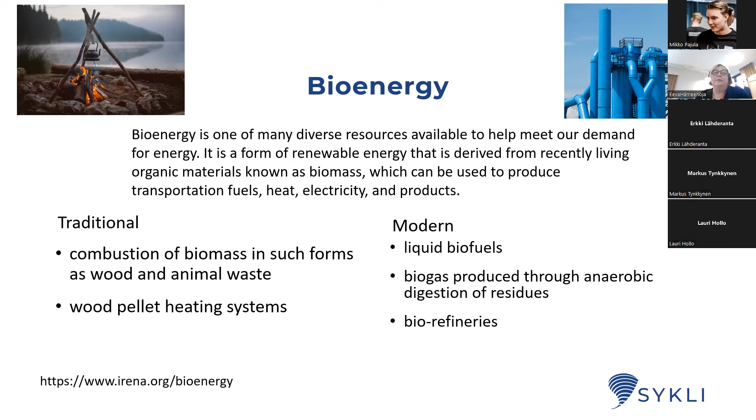The EU Renewable Energy Directive defines what biomass is, because biomass is used to produce bioenergy, and you can read the definition there. One thing which is very important is that bioenergy is part of renewable energy, but there are many other kinds of renewable energy available: hydropower, wind energy, solar energy, and so on.

But bioenergy is a very important one, and it's also important because it's very flexible and can support, for example, when we are using wind or solar energy. So bioenergy can be very helpful to maintain the energy system in that sense.

Bioenergy is also part of the bioeconomy, and besides bioenergy these products are very important. In the European Union's bioeconomy strategy, the goals are food security, employment and competitiveness, climate change, sustainable management of natural resources, and dependence on non-renewable natural resources. In Finland, we have also added ecosystem services as part of the bioeconomy.

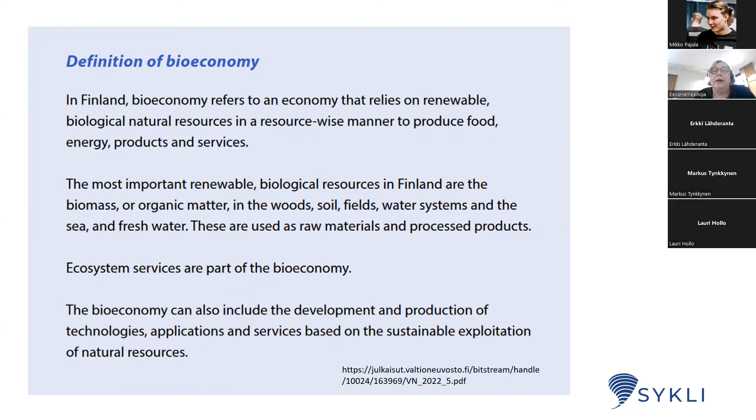This is a definition. In different countries the bioeconomy is defined in a bit different ways, but everywhere there's agriculture, forestry, and the pulp and paper industry and wood products industry are always there.

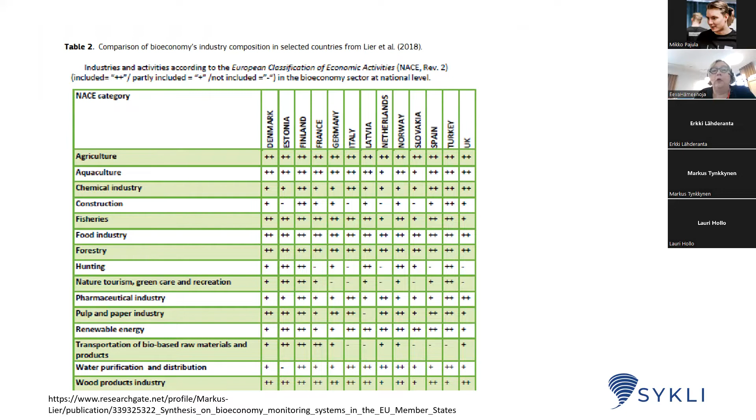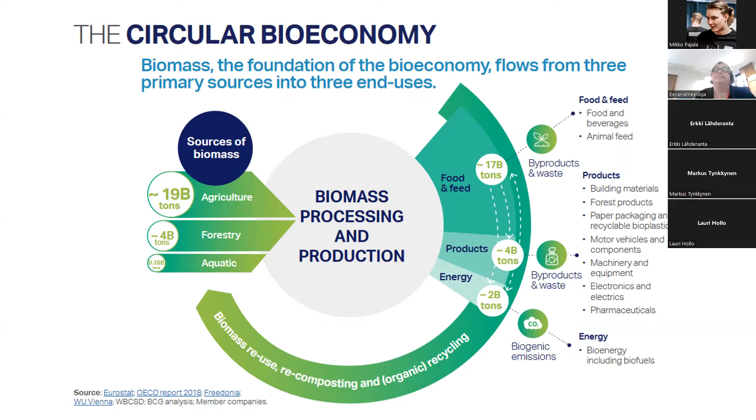Bioenergy is also a very important part of the circular economy and circular bioeconomy. When we talk about bioenergy, it's important to understand that we have food and feed, bioproducts, and energy, and in a way these fields compete with each other, and quite often we have to choose where we put our effort. So it might be that an increase in bioenergy is not possible, for example, if there's a shortage of food and feed, so this whole picture is important to understand.

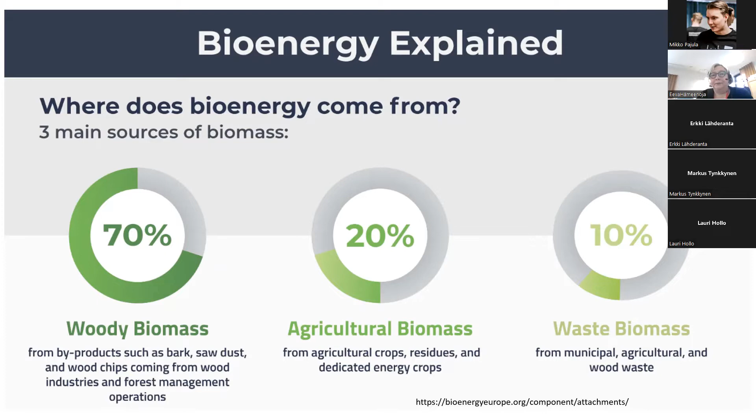So where does bioenergy come from? We have three main sources of biomass: woody biomass, agricultural biomass, and waste. As you see, woody or solid biomass is the most important, especially in the northern part of Europe.

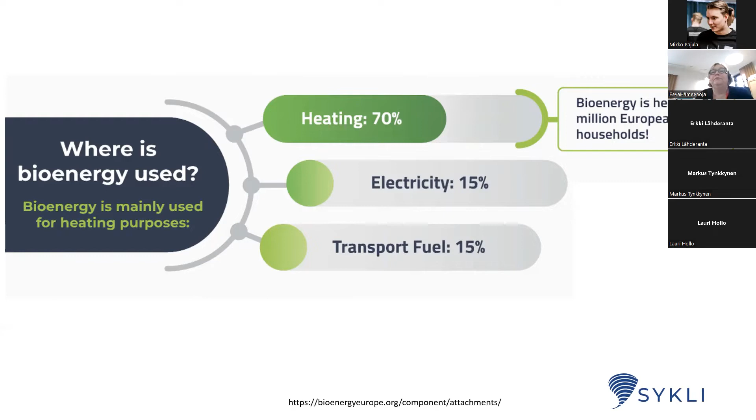And what do we use bioenergy for? The main part, about 70%, is used for heating, then for producing electricity and as a transport fuel. In heating we can use individual biomass stoves or biomass boilers, or it can be used in district heating.

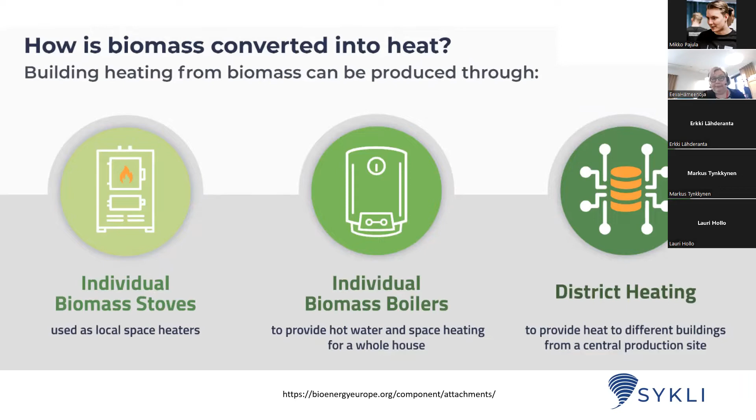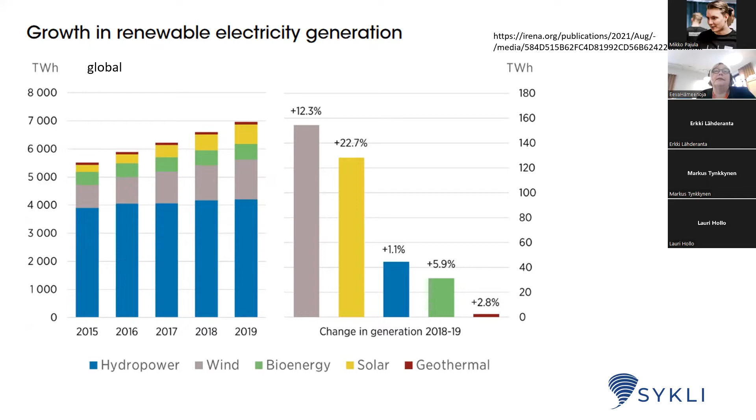And if we look at which parts of the renewable energy branch have had the most rapid growth, as you may know, wind growth has increased over 10%, and solar, the total consumption is less, but the growth is more, and hydropower has remained about the same, and bioenergy has grown about 6%.

So the EU has set a target for renewable energy, and as a whole it was 20%, but this common target was divided among different countries, and they had different national targets. You may wonder why they are so different, and this was done so that the countries reported what is possible for them and how much renewable energy they already have, so they have influenced very much the target which is set for them.

And in 2020, Sweden, Finland and Latvia had reached this target, and Portugal as well. And the others are still a little bit behind.

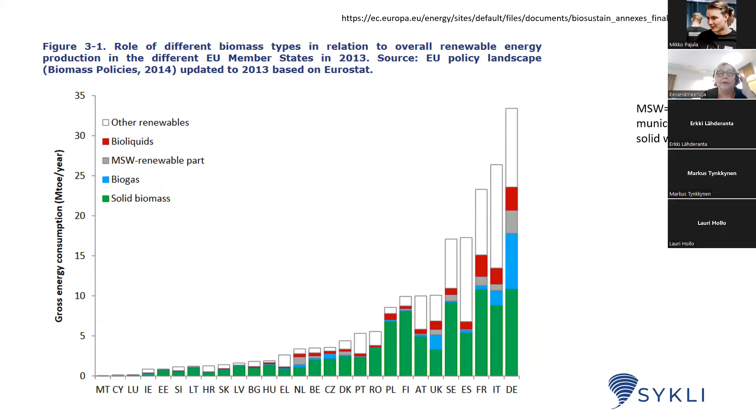This is when we look at the different countries in Europe and the biomass types used for bioenergy, and as you see, solid biomass, which means wood biomass, is the main one, and in Germany the biogas part is also quite significant. Besides this, municipal solid waste is the gray one here. Bioliquids, which are used for transport, have a smaller share, but the pressure to increase that part is quite high.

In Finland, wood fuels, of course, we are a country with a lot of forests, so wood fuel has always been very high in Finland, and if you look at total energy consumption, almost one third is covered by wood fuels. And what is very important is black liquor. It means that it's in the pulp and paper industry.

This black liquor is part of the process products, and it's used for energy production in the pulp and paper industry, but the amount of energy is so high that the industry is not using all of it, and it can also be sold to other customers. So it's a very big part of wood fuels. Then we have bark, sawdust, forest chips, sheets, and pellets.

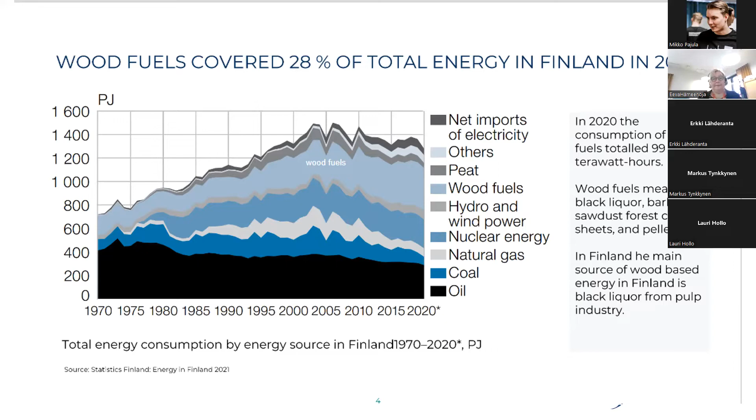So as I already said, these incentives and the use of these policy instruments have been very strong in the European Union in order to increase the production of bioenergy.

Bioenergy is also a topic where, when you read articles and news about it, they can be very diverse, because it depends on whether it is the industry, the landowner, an environmental organization, or some administrative person who is writing about it. So the opinions and thoughts can be very diverse, and it has also been an object for very strong policy instruments in Europe.

So in Europe, there's the Green Deal. There are a lot of targets for the bioeconomy: a fair and prosperous society, a resource-efficient, competitive economy, and so on. And maybe the most important is the climate law: the European Union wants to reach climate neutrality in 2050, and the energy system should be decarbonized, and so on.

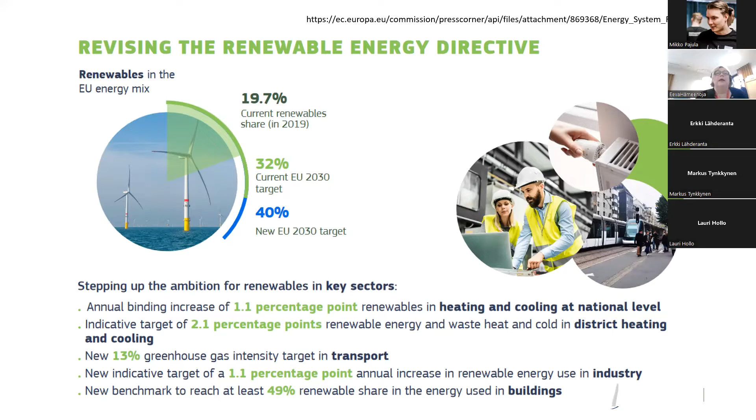It means that biomass should be used according to the highest economic and environmental added value. So in the first place, try to use biomass for wood-based products which have a long life, and try to extend their service life. Then reuse and recycle the woody biomass. Bioenergy comes only after product and material use, which should be prioritized first, and in the worst case there is disposal of the biomass.

About the Renewable Energy Directive, there are still some details here if you want to look at them more thoroughly. And I also added here the EU strategy on energy system integration, because now these energy systems are mostly linear, and there are wasteful flows of energy, and now the development is going toward more integrated energy systems. And here, as I already mentioned, bioenergy is flexible, and it can be used in many cases where electrification is difficult.

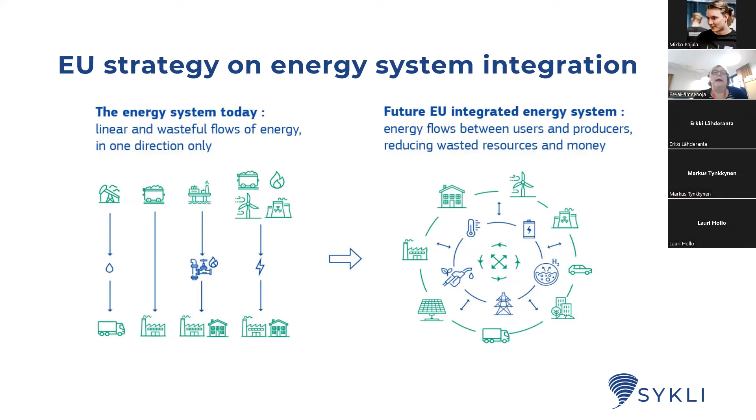For example, in wind and solar energy, the problem is that it's not always there. Sometimes it is available, but not always. So bioenergy can also then help in balancing the system.

The most criticism from industry is that these decisions change so frequently. So in order to be able to invest, the industry should have confidence that these regulations are long term, so that the investments are done in the right place and there are no rapid changes. So besides this regulation, of course, there are also some other kinds of incentives.

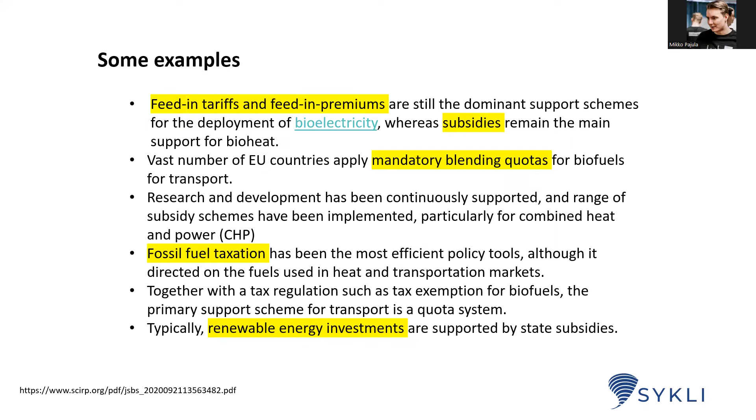And what is now maybe the most important are investments in renewable energy and bioenergy. Because we want this energy transition, and in order to do it quickly and efficiently, these investments and support for these investments are also needed from the state. Then there are some examples of fuel taxation in Nordic countries. They're a bit different, but fossil fuel taxes include both an energy content and a carbon content tax in all Nordic countries.

And because the Nordic countries have been quite successful in the use of bioenergy, when it has been studied what the reason is, the explanation, for example in Finland, is that biomass resources are good, infrastructure is good, and incentives also support their use. In Sweden, the result is the same. And in Denmark, only infrastructure has a very high contribution, and incentives somewhat. So although we criticize regulation and the complexity of the system a bit, the incentives still have an important role in the energy transition.

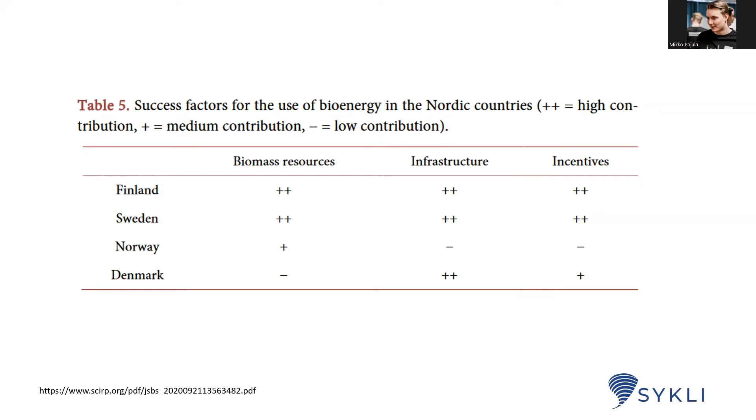Then next we should look at the feedstocks of bioenergy in the EU and Finland. So as already discussed, woody biomass is the main one, and agricultural and bio-waste also have some role. Looking at these potentials from 2020 to 2050, the forecast is that the amount of agricultural residues decreases a little. Energy crops grow a little, and forest biomass also has some growth.

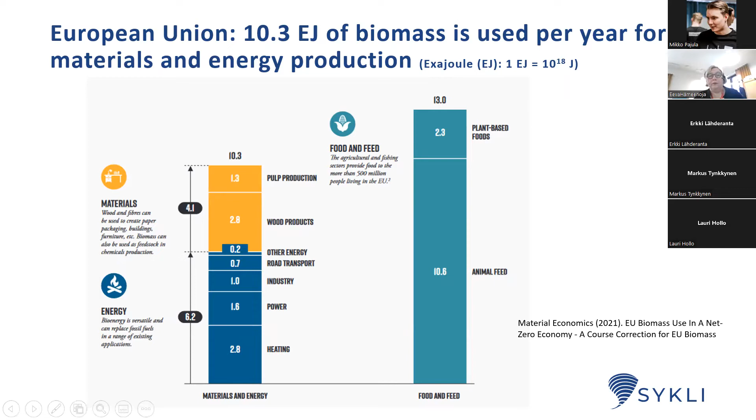In the European Union, the total amount of biomass, expressed in energy units, is 10.3 exajoules, divided so that energy has 6.2, materials 4.1, and for food and feed it's 13 here. And very often the use for energy and the use for materials are competing, and according to the cascading principle, material use should be emphasized. So it has an influence on the amount of bioenergy in the future.

Then there's domestic and industrial waste, agricultural residues, food crop residues, process residues from the food industry, biofuel and biochemical production residues, and then various organic waste flows.

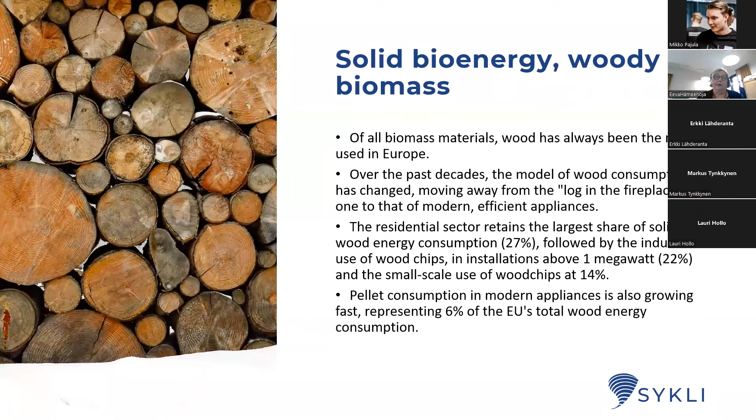So solid bioenergy, woody biomass, is most used in Europe, and we can look here more. The very traditional ones are firewood, and charcoal is most common from thermally treated woods. Then densified wood pellets and wood chips are used in energy production.

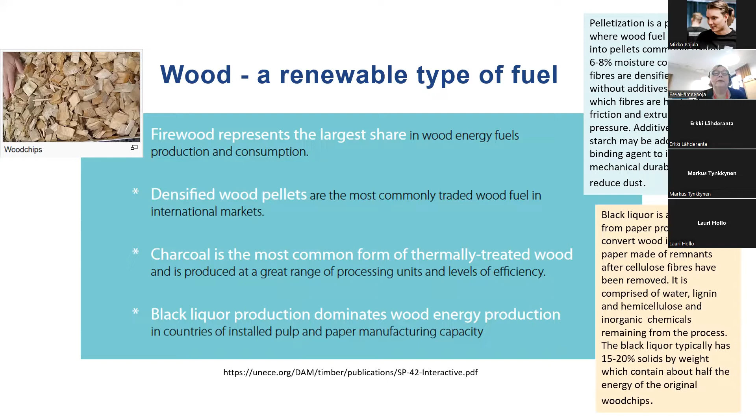And then black liquor, which I think I already mentioned, dominates the wood energy production in countries where the pulp and paper industry is significant. In Finland, wood biomass is very important. We have small-scale combustion of wood in private houses, and then we have solid wood fuels in heating and power plants, and black liquor is very important.

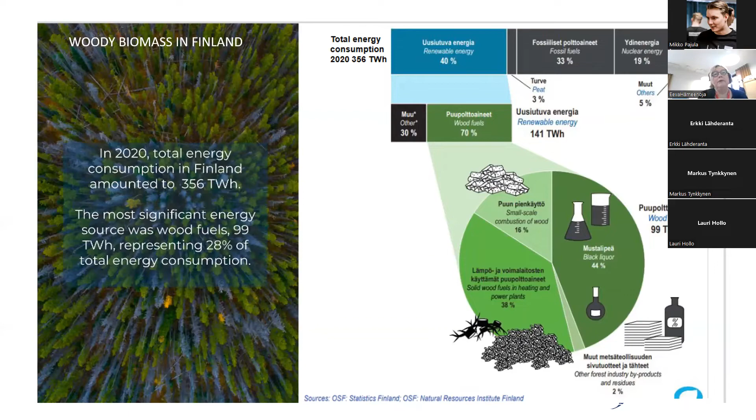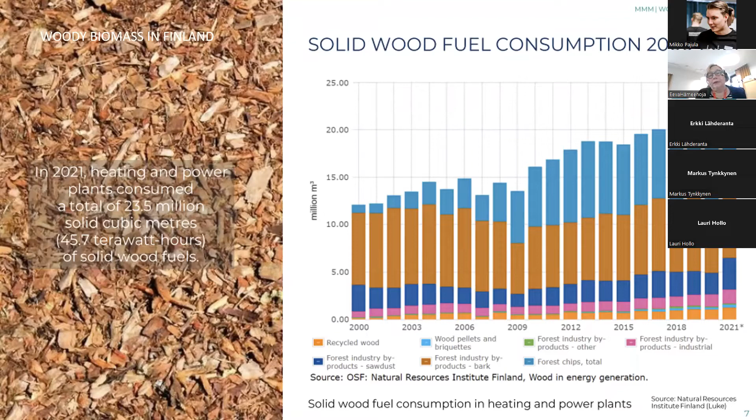Here, when we look at what has happened during the last 20 years, forest chips have increased, and also forest industry byproducts. If you look at the yield of different products from harvested tree trunks, roughly over 40% is used for building products, and about the same for pulp and paper. The share of bioenergy is much less, but it's still about 10%, a little bit more.

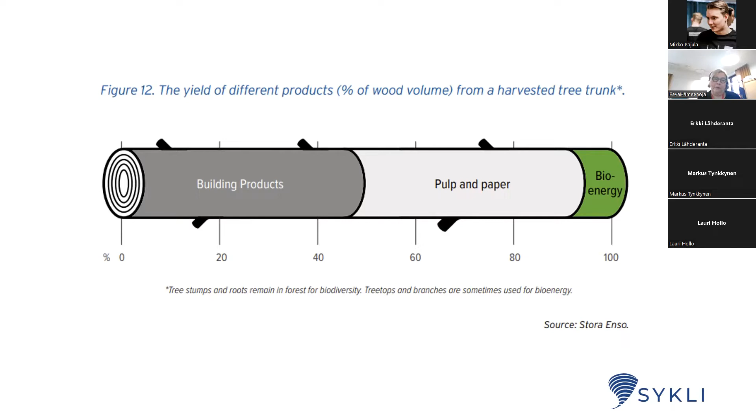And here Stora Enso mentions that tree stumps and roots remain in the forest for biodiversity. So this is a change. Previously these stumps and roots were also collected for bioenergy use, but now, because of changing requirements for biodiversity, it's more common that they remain in forests.

This is, I think, a nice presentation of biomass and energy flows. This is from the Swedish forest, and here we can see that from the stem wood, part goes to pulpwood, and part goes to timber and sawmills, and then stumps, roots, branches, and tops go to decomposition and stock increase in forests.

And if we look at the products, of course we have paper and pulp, we have wood products, and from the pulp and paper and the branches and tops, we also get district heat and bioelectricity. From pulp mills, as a side product, we can get biofuels and also other heating excluding district heat.

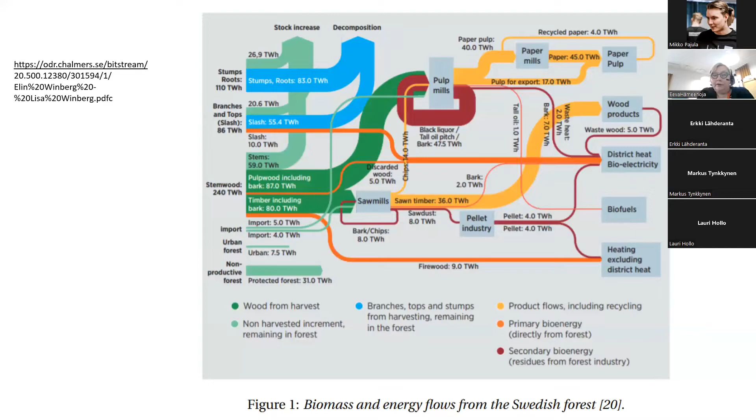And I think the trend is that the industry and also policy try to get more wood products, side products and biofuels, and decrease the share of heating, trying to utilize more of lignin and other substances of wood for more advanced products, not only for combustion.

So wood removals. We used about 5 exajoules per year, and the upper limit is estimated to be 5.6. Biodiversity and soil health limit the harvesting, so there's not much growth available. Residue removals are the same story: an increased rate can risk the carbon cycle and biodiversity. And industrial byproducts for energy use can marginally decrease over time.

About agricultural residues and dedicated energy crops. Dedicated energy crops means that there are some food crops or some perennial forest crops grown especially for energy. It can be traditional heat or modern heat, or it can be power fuels, first generation biofuels or advanced biofuels, or even chemicals and novel materials.

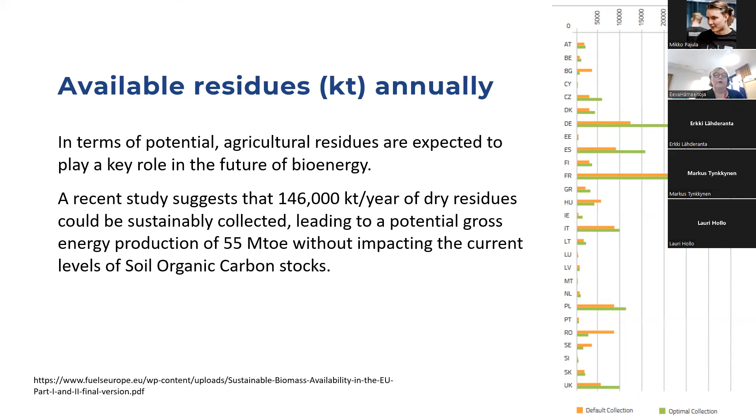But of course, there's also a limit there, so that this soil organic carbon content must be maintained. So it's all of this always when this biomass is concerned. So there has to be care that this biodiversity or these organic stocks are not overused.

When looking at the future, these food-based biofuels, it's forecast that their amount is decreasing because there are quite many agricultural constraints. The first is environmental sustainability. So climate change has influence on agriculture, especially in southern Finland, southern Europe, and also soil quality, quantity, and water.

They limit the use of agricultural biomass, and what is very important is that this competition with demand for food and feed and fibers is quite great, and so bioenergy use is decreased also because of that.

So right now in Europe, 5 to 6 million hectares is used for energy crops, and it's about 0.8 exajoules, and in this Material Economics study, they say that the upper limit would be 5.6 exajoules, but then the land needed would be 35 million hectares, the size of Germany. So that kind of growth is probably not possible in Europe.

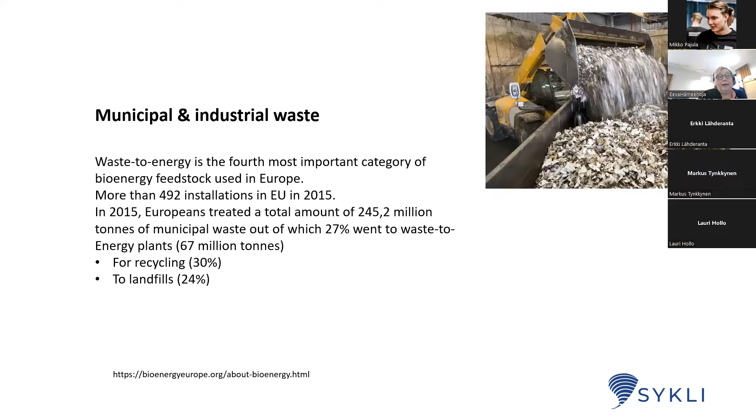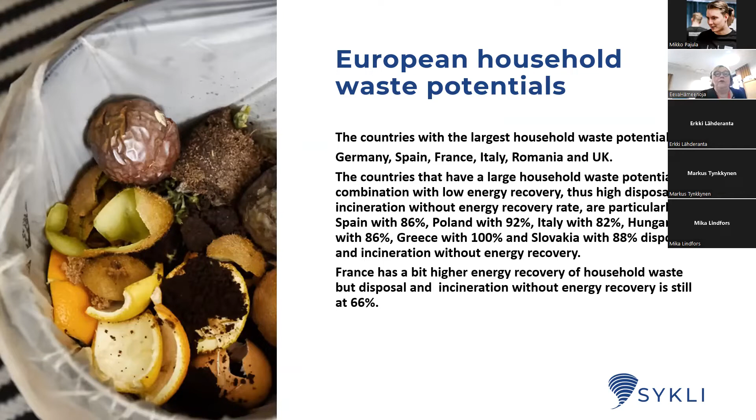The countries with the largest household waste potentials are Germany, Spain, France, Italy, Romania, and the UK. They have large waste potentials, and they have incineration without energy recovery. So they combust waste, but especially the countries mentioned here don't always recover the energy from it. So they only have the emissions, but not the useful use of that heat.

In Finland, in northern countries, and also a big part of Europe, we have a landfill ban, which means that organic waste has to either be recycled or combusted. The UK is not part of the EU anymore, but in Southern Europe we still have big countries with no ban on landfilling, and this means that this organic waste is not used, but only produces methane emissions in these landfills.

So this would need a change in the European Union, and there would also be the possibility to increase the amount of bioenergy and decrease these methane emissions.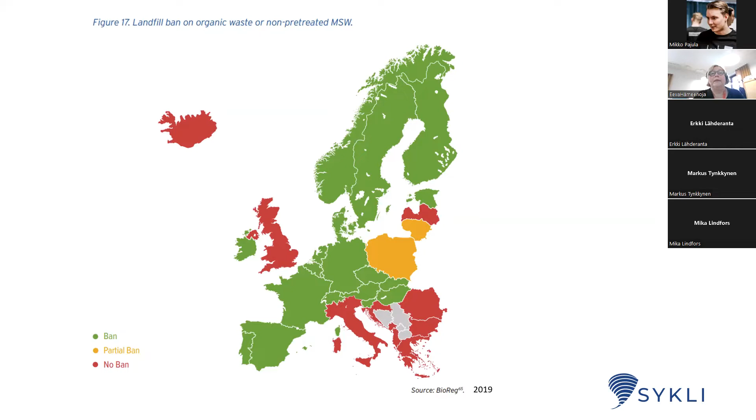If you look at the situation worldwide, there's a lot of food waste globally available. So that would be a potential for increasing bioenergy. It's only that it needs collection, it needs technology, so it doesn't come free, but it needs organization and investments.

But if you look at global bioenergy supply by source, looking at net zero emissions, the biggest growth here is in these organic waste streams. So in Europe we have a possibility to improve to some extent, but globally there's a great possibility to use these organic waste streams for energy production.

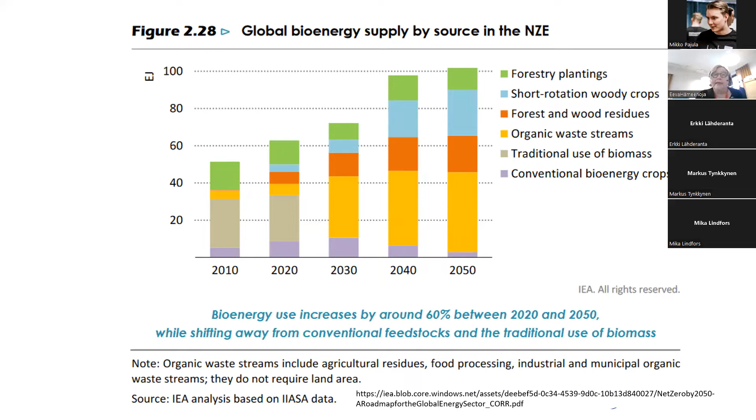So recycling and waste: for paper waste, we have a little bit of potential in Europe. For wood waste, a little. For other waste, as we saw, for example with these landfill bans, with better collection and better use of waste generated, this other waste can be doubled.

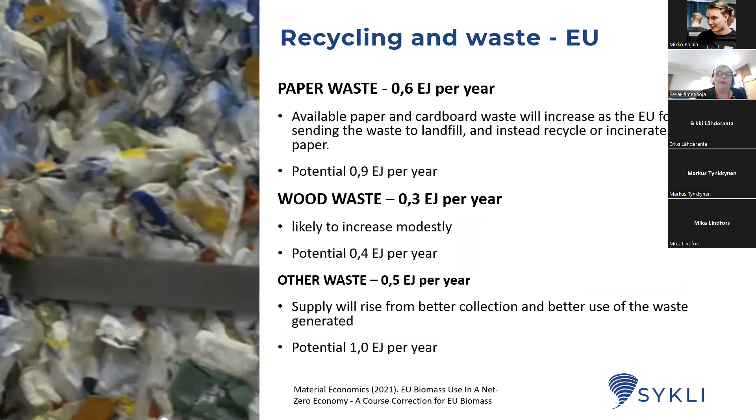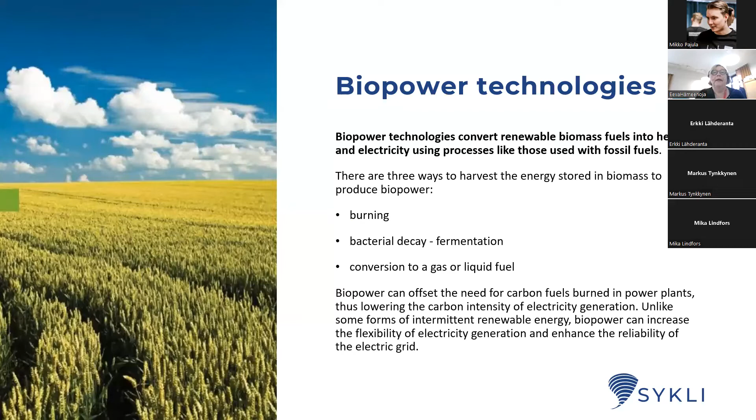And in bioenergy from waste, combustion is the most common one. There, municipal waste is incinerated in CHP plants, so both heat and electricity can be produced simultaneously, and the heat from waste incineration can be distributed to consumers with a district heating system. And district heating, of course, can also be provided through heating plants or waste heat from industries.

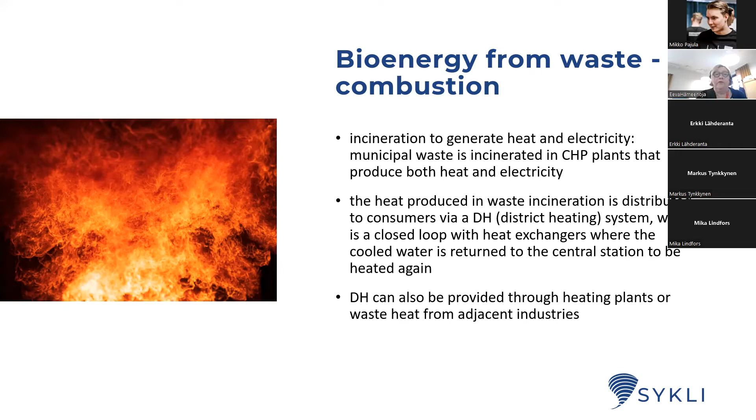So this waste to energy CHP is just a description of that. So in this CHP plant, steam is produced from the combustion, and through the steam turbine we can produce electricity, and at the same time there's a production of heat. And of course then we have some wastes here. We can have some landfilling parts, we can maybe collect some metals there, and there can be some ash, some aggregate coming from the plant.

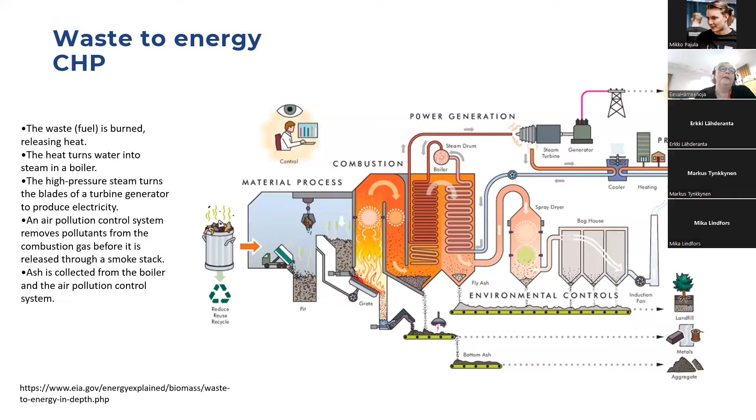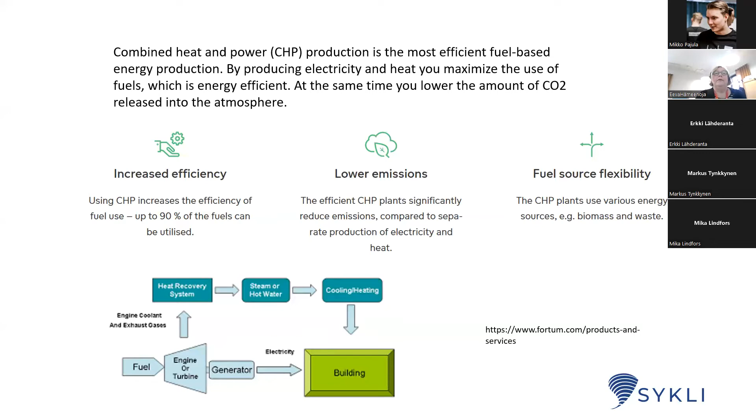And this combined heat and power is very efficient because when we produce electricity and heat at the same time, the use of fuels is maximized, and also the amount of carbon dioxide released can be reduced. So using combined heat and power, the efficiency is high, up to 90% of the fuels can be utilized, and compared to separate production of electricity and heat, there are also lower emissions, and the fuel source is very flexible. It can be biomass and waste, so different kinds of mixtures of these fuel sources.

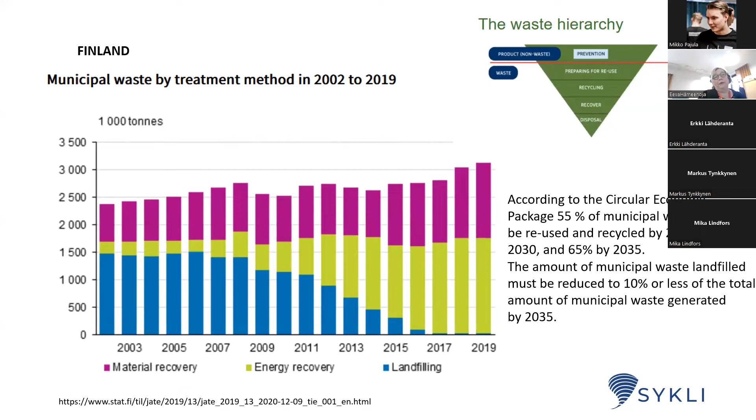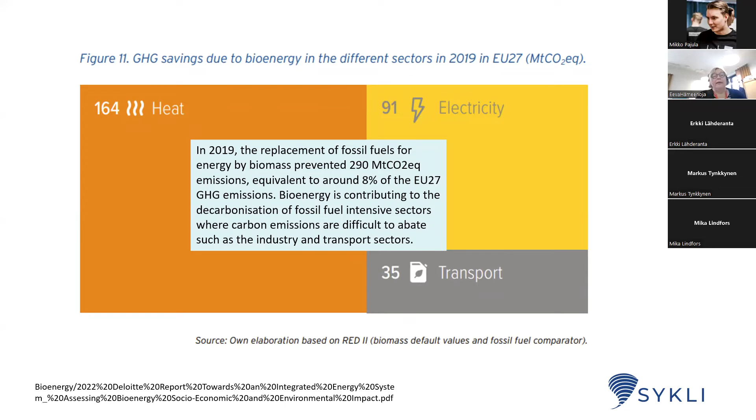On the other hand, if we look at this from the other direction, if we would use fossil fuels for heat, electricity and transport, and we replace fossil fuel by bioenergy, we can get that much savings in different sectors. And these are megatons of carbon dioxide equivalents. So using bioenergy instead of fossil fuels is very good. But if we look at it from the circular economy point of view, energy efficiency or saving energy and doing more material recycling would be the best possibility.

Because we are a little bit behind in our emission targets both globally and in the European Union, we are in the situation that we have to maybe capture some carbon dioxide from the air. We have to, of course, produce less of it or use bioenergy, but also carbon capture and storage is maybe something which is necessary in the future.

So carbon capture and storage, CCS, is important to know about also when we talk about bioenergy. When we do carbon capture and storage together with bioenergy, it's called BECCS, and it's a carbon dioxide removal technology. To meet climate goals, cumulative values of 7.5 billion tons of carbon dioxide may have to be sequestered through BECCS in Europe.

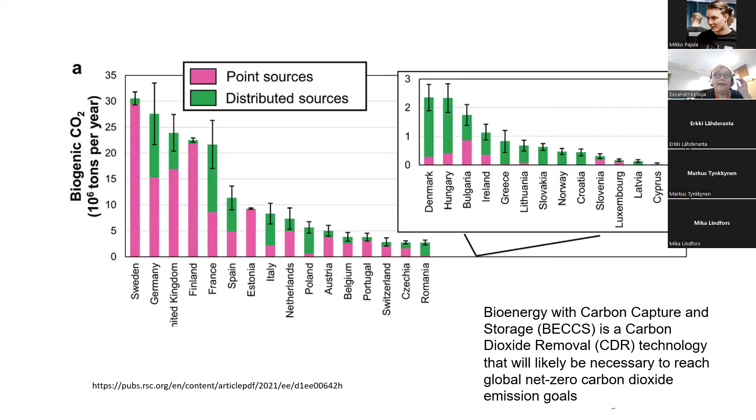If we think about this removal of carbon dioxide, of course it's easier with these point sources where there's a big power plant or something like that, and you can just centralize this collecting and you have a lot of emissions in one point, so it's easier to handle. In these distributed sources, small amounts of carbon dioxide are produced in a distributed way. So collecting or treating this emission is more demanding.

This is a bit more information about this BECCS. In Europe, Sweden, Norway, and the United Kingdom, and there are a lot of processes also in Finland developing this BECCS, with the aim of achieving negative emissions to reach the net zero climate goals. So this is just a schematic diagram of this carbon dioxide.

So if we start here and use fossil fuels, they are either combusted just to get heat, or they are used for producing some products or for transport and so on. So then there's an emission of carbon dioxide in the atmosphere, and it's net positive. So there's a positive emission coming from these fossil fuels.

If we add to these fossil fuels this carbon capture and storage, this carbon dioxide is stored in some kind of caves or underground containers and so on. So then we can get net neutrality here. As much carbon dioxide as is released is also stored.

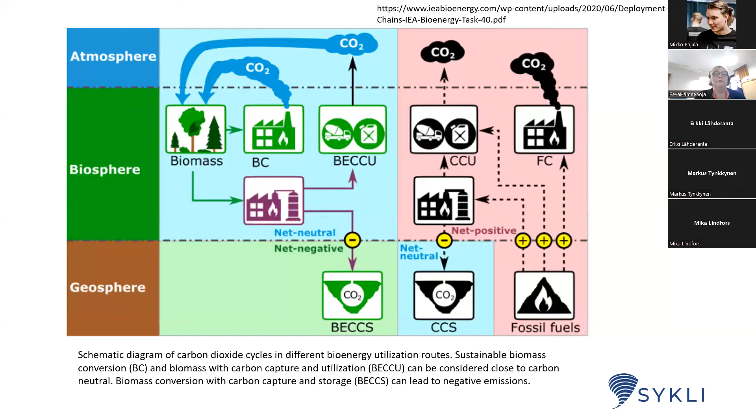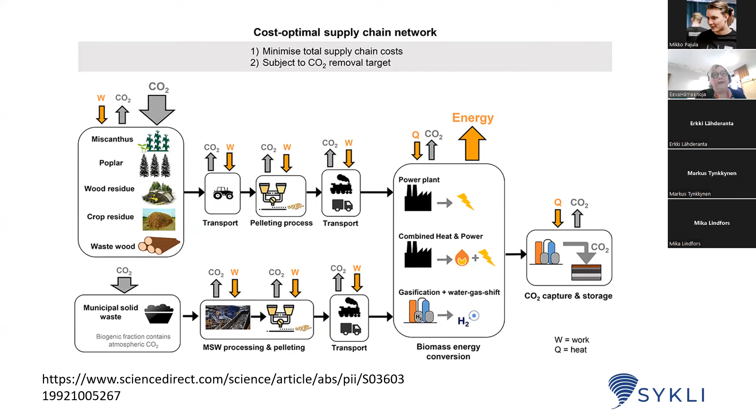Then this is only to remind that when we look at the carbon dioxide emissions of bioenergy, we can't only look at the biomass energy conversion, but we have to look at the whole chain. So it has to start here with the growing of plants, trees, transport, pelleting, transport, and so on, and all these emissions of carbon dioxide must be added. Of course, this part here is also a carbon sink, so more carbon dioxide is bound here than released. So that's a negative part of this chain.

What about then this carbon dioxide? One possibility is storage, in some kind of underground cave or container. But the better possibility would be to utilize this captured carbon dioxide, so where could it be used? One possibility is that construction materials get carbonated, so they can bind carbon dioxide to some extent.

There can be chemical conversion. If we use chemical conversion, for example using hydrogen, hopefully green hydrogen, fuels, chemicals, polymers and commodities can be produced. These fuels can be methane, methanol, formic acid, synthesis gases, and they can then be refined further to olefins or gasoline and fuels.

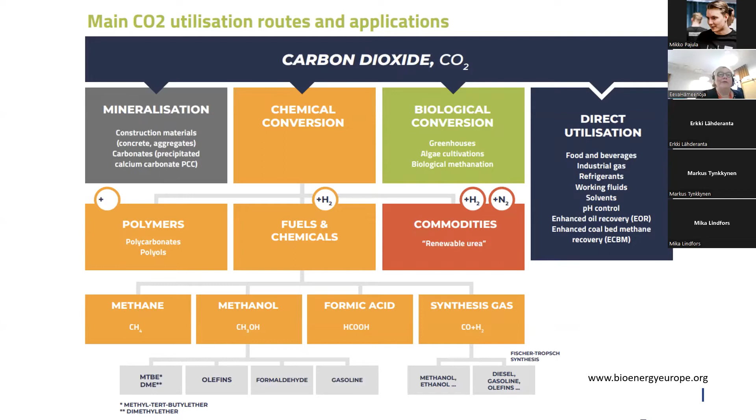But still, we are on the way. The direction is good, but we are not there yet. One branch of this bioenergy, biogas, is something which is already here and it's already used. And the European biogas sector is very diverse. It can mean waste management or generating renewable energy, or a combination of these two.

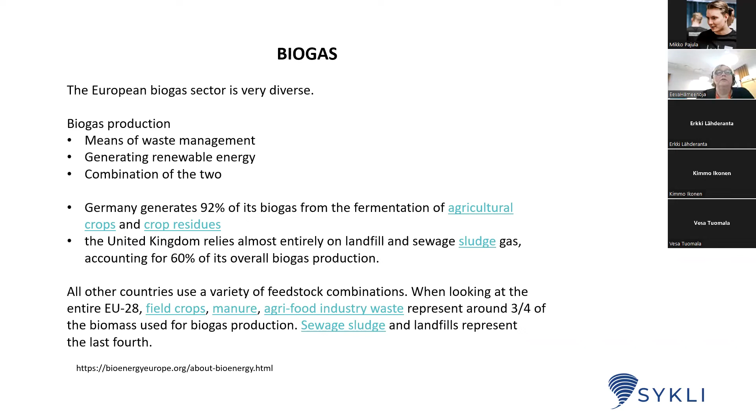For example, Germany generates almost all of its biogas from agricultural crops and crop residues, and the United Kingdom from landfill and sewage sludge gases. Other countries use a combination of different feedstocks. And this biogas is applicable in numerous sectors, in heating and cooling and electricity production and so on. And what is good is that this production process is mature and resilient. It can make use of a great variety of substrates.

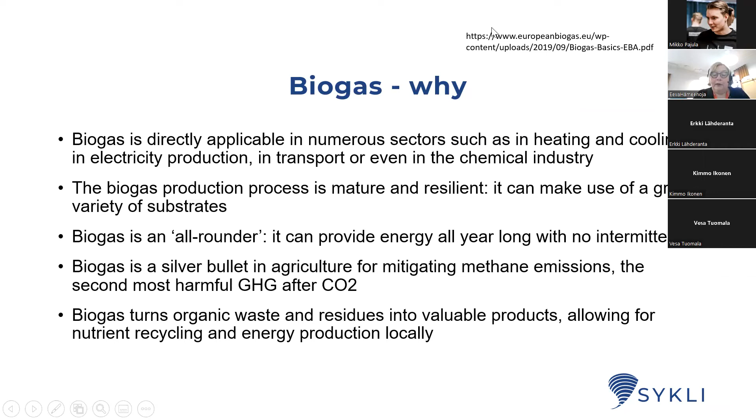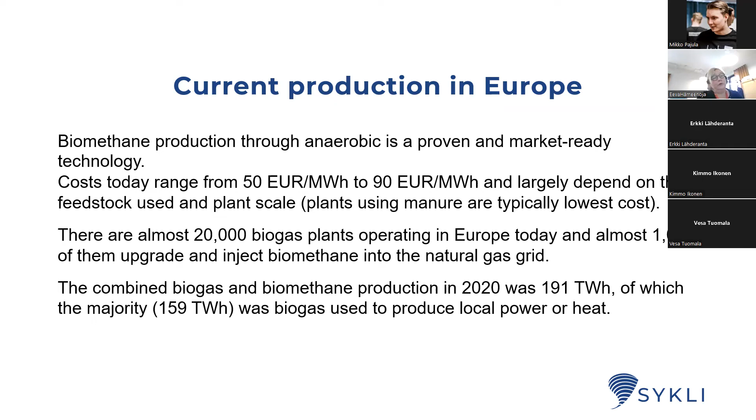So while these CCS and BECCS I was talking about are still under development, and also this chemical conversion, biogas is already here and it can be used. It's a market-ready technology, with almost 20,000 biogas plants operating in Europe. It starts here: the feedstock can be sludge, animal byproducts, household bio waste, and so on.

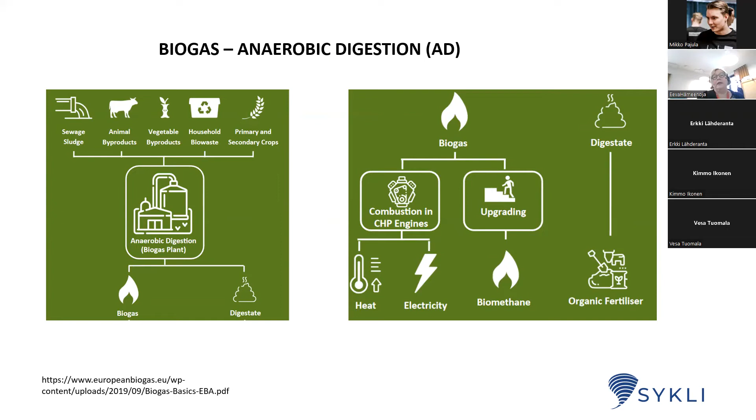And then we have the anaerobic digester and biogas plant, which produces biogas and digestate. When we take these products, for the biogas there are two ways. It can be either directly combusted in CHP engines for heat and electricity, or it can be upgraded, meaning it can be dried and purified to biomethane, and then it can be used as a traffic fuel. And the digestate can be used as organic fertilizer, which can then replace fossil fertilizer use.

So this is about the same. It's this anaerobic. Yes, and besides this upgrading to methane, biomass gasification and methanation can also be used, and it can be put in the gas network or used as fuel. The difference between biogas and biomethane is that biomethane is quite pure methane, and in biogas there are also some impurities, some carbon dioxide and so on. But for combustion, you can also use unpurified biogas.

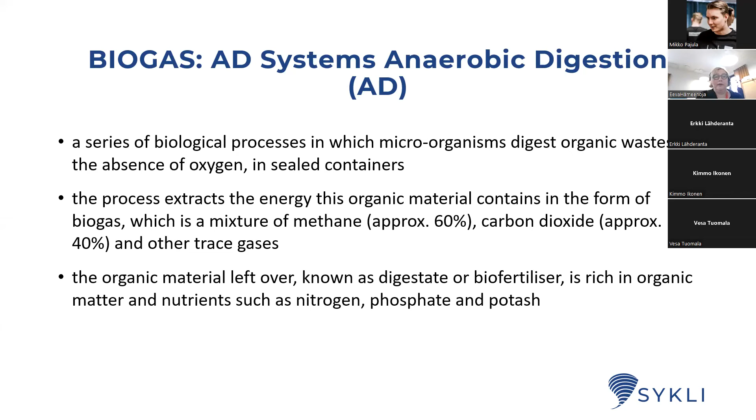So anaerobic digestion is, as in the name, in the absence of oxygen, and there are some microorganisms which digest organic wastes, and there's a mixture of methane, carbon dioxide, and other trace gases. These are the end products, and this is the biomethane, which is one of the most flexible renewable energy carriers, and it can be produced throughout the whole year, and it's very flexible.

And right now the situation, for example, in Finland is that fossil methane has always been cheaper than biomethane, but now, because of the war in Ukraine and the situation that we can't import gas from Russia, biomethane is one of the cheapest fuels one can use in a car.

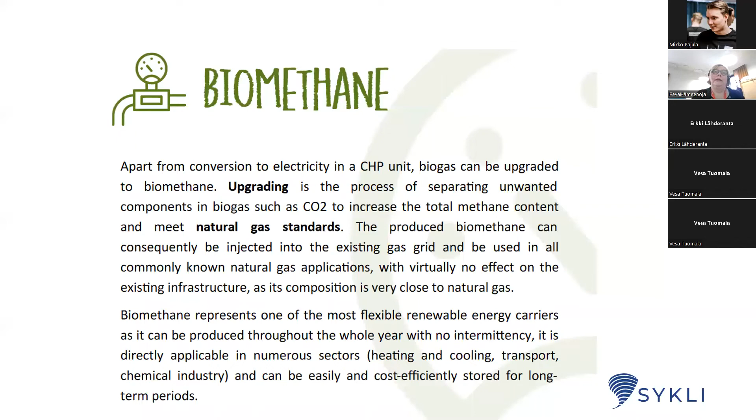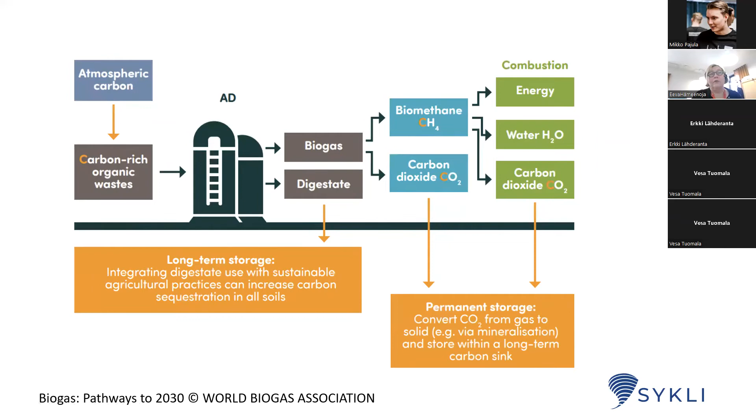Biogas can also be considered a very important part of the circular economy. So it can return nutrients to farms. It can avoid emissions from landfill, generate renewable energy, and a lot of carbon savings can be achieved because of it. And permanent storage of carbon dioxide can also be done, of course, with biogas production, so that we would have negative carbon dioxide emissions if we add that to this production.

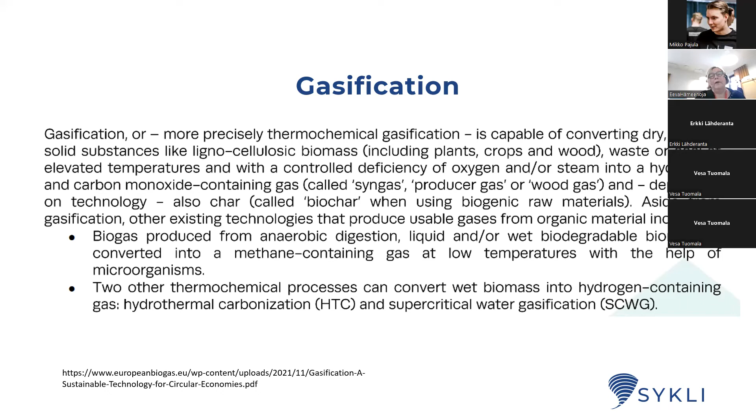Another technology which I wanted to add here is gasification. Anaerobic digestion is the one which is very much used, and it's well known. With the gasification process, we can convert dry organic solid substances like lignocellulose biomass, waste, coal, to so-called syngas, producer gas, or wood gas, and that again can be converted to methane-containing gas and also to other substances.

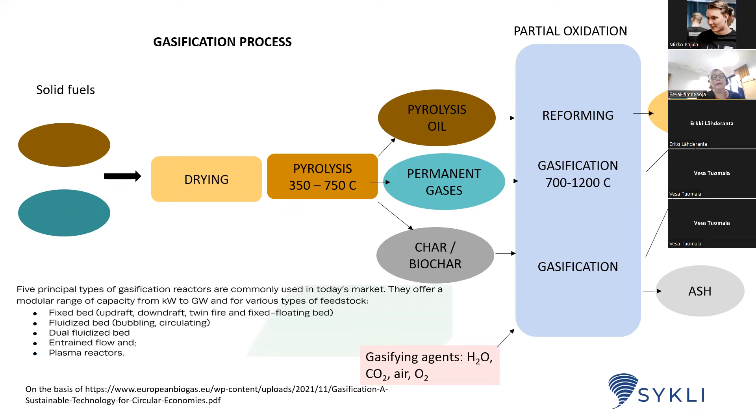And why this gasification and syngas is so important is that syngas is a mixture of hydrogen, carbon monoxide, and some light hydrocarbons, and the syngas can be converted to fuels, mixed alcohols, methane, hydrogen, ammonia. So gasification has the potential to turn waste disposal into revenue streams for forest wood owners and producers, and it's a well-known and used technology.

Also these gasification plants produce not only renewable energy but also this carbon-rich material, biochar, which can serve as a stable carbon sink. There are new products where this biochar is mixed in the soil or in composting processes and so on, and it increases the organic carbon content of the soil, and also improves its qualities.

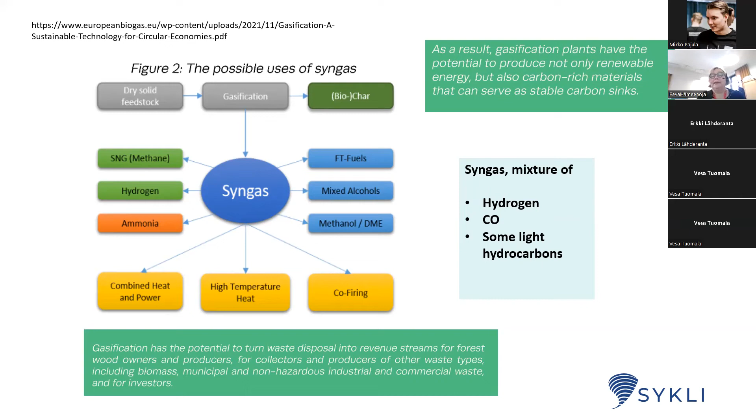With biogas, the global food waste alone could produce enough natural gas to satisfy the demand of Germany, or electricity for over 100 million people, and then there's livestock waste, which could produce enough natural gas to meet the demand of both India and China, and so on. So we already have the technology, and there is a lot of waste which is not utilized.

So organizing and investing in this branch, I don't know if it's easy, but anyhow it's a possible alternative to produce more bioenergy and to reduce emissions, and also to improve the economy, for example, in the developing countries.

In Finland we nowadays produce 1 terawatt hour of biogas per year, and the capacity of Finland would be 25. Now the goal is to increase the production to 4 terawatt hours by 2030, and this would be very important for the Finnish countryside, because there are a lot of economic problems because of the high prices of energy and fertilizers, and in some parts there's also a problem of how to treat the manure of the cattle and where to put it. So increasing the amount of biogas would solve many problems at the same time.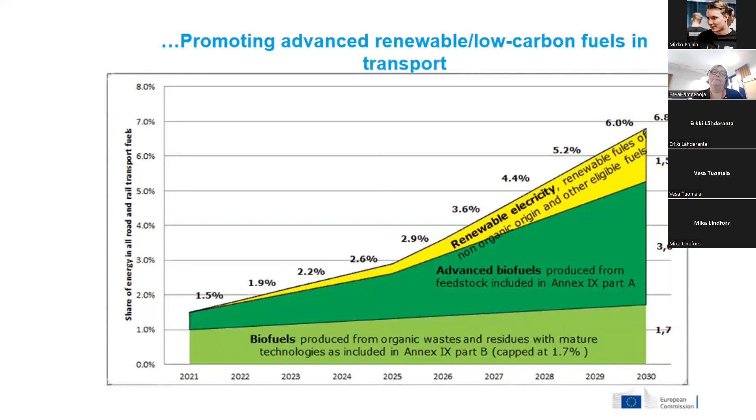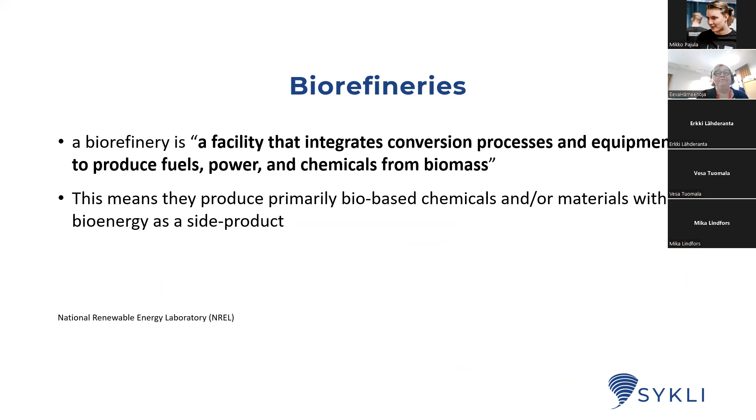Before we go to the challenges, I'll talk some words about biorefineries. The definition is a facility that integrates conversion processes and equipment to produce fuels, power, and chemicals from biomass. It's a very fast-growing sector in Europe. In feedstock, there is either primary biomass or secondary biomass. The primary is aquatic, lignocellulosic from croplands and grasslands, lignocellulosic from forestry, and so on, and these are the residues and wastes here.

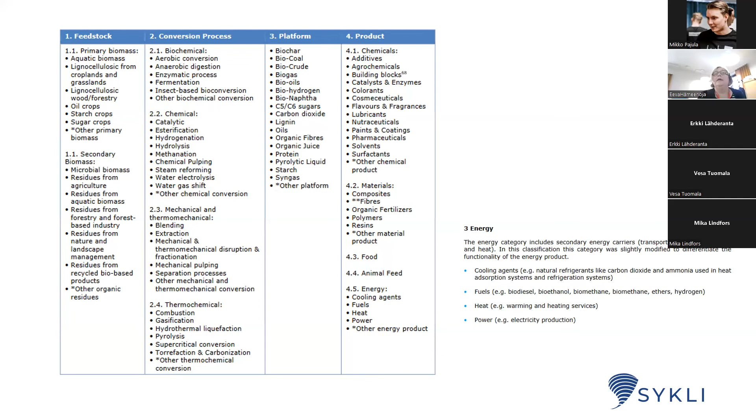Then the conversion processes: biochemical, so fermentation or anaerobic digestion, what we already discussed. Then there are more exotic ones like insect-based bioconversion and other biochemical conversion. Then chemical catalytic conversion, mechanical, and thermochemical, with thermochemical combustion at the bottom. This platform here is the product group used, and then here are the products. As you notice, most products are either chemicals, materials, food, or animal feed. These don't directly belong to bioenergy, but we also have the bioenergy part: cooling agents, fuels, heat, power, and other energy products. Very often this energy part consists of side streams, side products when producing these chemicals or materials.

And in Europe, well, in 2020, there were about 140 biorefineries based on chemical pulping. And what did they produce? They produced man-made fibers, pine oil products, and biodiesel and naphtha. And what they were developing is biodiesel and naphtha, which was also there on the plant side, biochemicals and lignin oil.

And this is category 1, the most common biorefinery based on lignin or wood materials. So forest-origin feedstocks and facilities based on chemical pulping, and the main product is cellulose fibers, and then there are side streams: materials, chemicals, fuels, food, feed, pharmaceuticals, cosmetics. They can be either produced on site, or these side streams can be sent to conversion units off site, and here the product set is the same as in the on-site part.

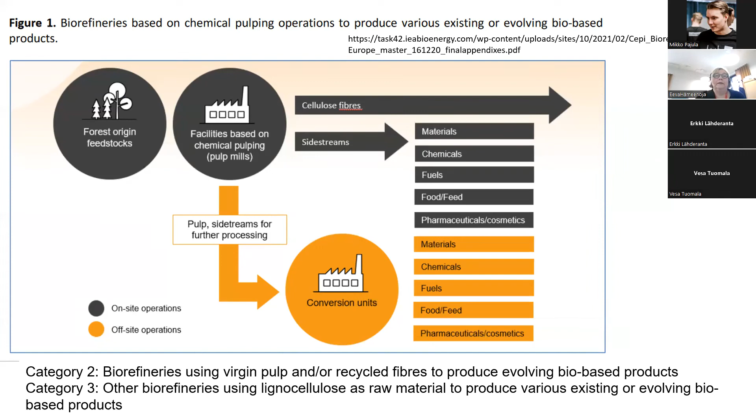And the other categories are biorefineries using virgin pulp and recycled fibers, and biorefineries using lignocellulose as a raw material. Well, here the text is a bit small, but hopefully you can read it.

So it means that those substances which in earlier years went to the black liquor and were burned and used for energy production can now also be used for material and chemical production, and their value in that form is much higher, although bioenergy is also important for us.

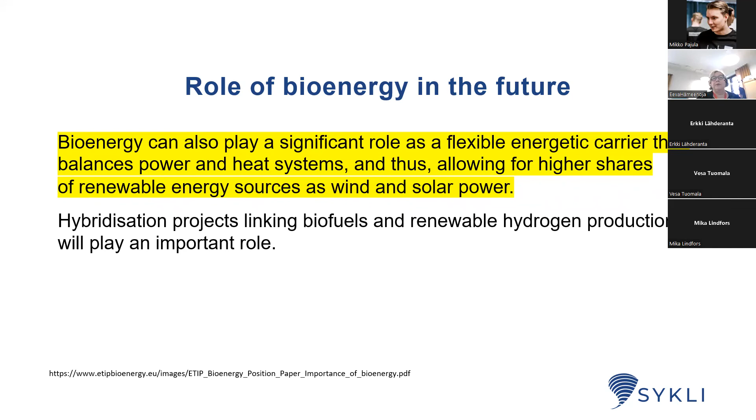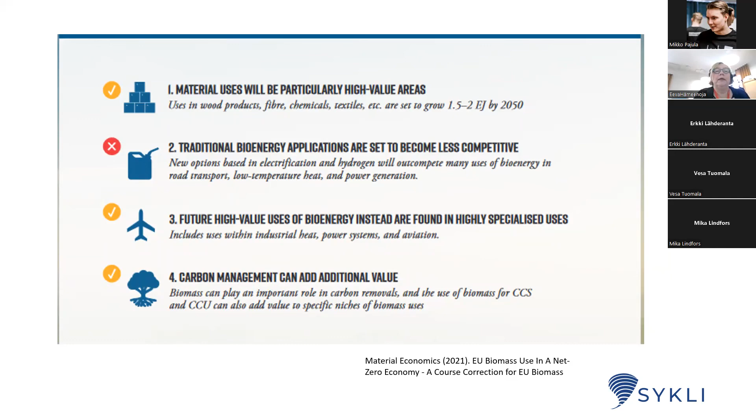Material uses will be particularly high-value areas, and traditional bioenergy applications are set to become less competitive, and future high-value uses of bioenergy are instead found in highly specialized uses. And carbon management, CCS and CCU, which we have looked at a little, can add additional value here.

So besides this gap, sustainable use of bioenergy requires that overall life cycle greenhouse gas emissions are well below those of fossil fuels. As I showed in one of the slides, the whole life cycle has to be taken into account, not only the energy production site. Aspects like cultivation of biomass, transport, processing, or potential changes of the carbon stock need to be taken into account. So it's not so simple that bioenergy always has no emissions at all; it has to be looked at in a bit more detail.

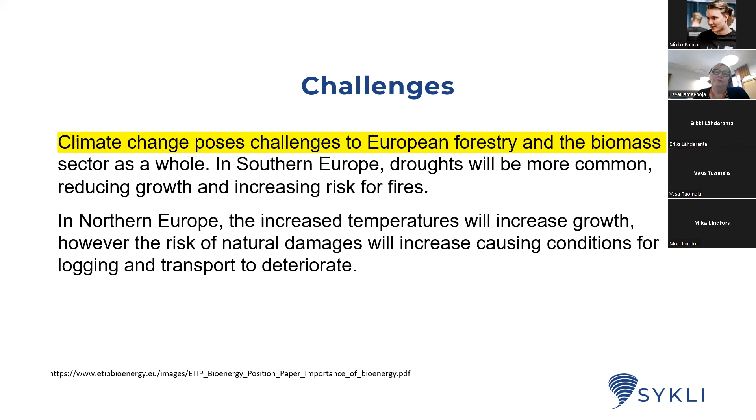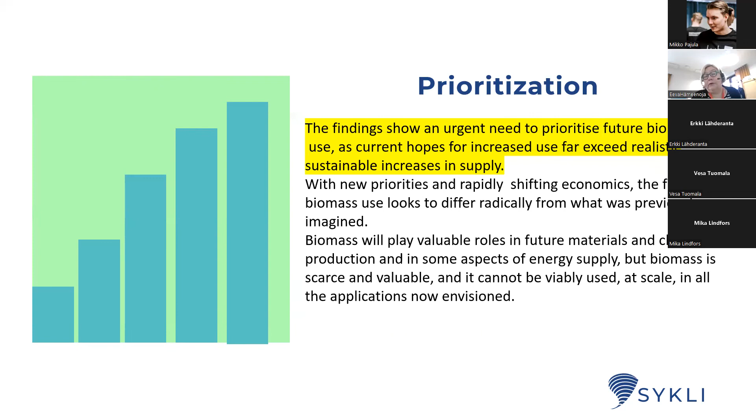More challenges: climate change poses challenges to the European forestry and biomass sector. There are some risks for the growth of forests and also cultivation. The findings show an urgent need to prioritize future biomass use, and current hopes for increased use far exceed realistic sustainable increases in supply. Biomass will play a valuable role in future materials and chemical production, and in some aspects in energy supply, but it's not a general solution for all the new needs.

So the benefits is that it answers to the renewable energy source targets, and it improves energy security, and it's storable renewable energy. With wind and solar energy, the problem is the storing of the energy, and here this is storable, which is a good thing, and it can help in grid balancing.

And it has the climate benefits compared to fossil fuels, and it can also contribute to growth and jobs, especially in rural areas which may need some support in the economy.

So risks are there: climate performance of certain biofuels and forest biomass pathways. This is indirect land use impacts of biofuels from food and feed. So there might be also environmental impact for biodiversity, air quality, and soil. Then competition with other biomass using sectors, so here is material and food, and low efficiency of biomass electricity conversion. So for electricity conversion, it's not the best possible alternative.

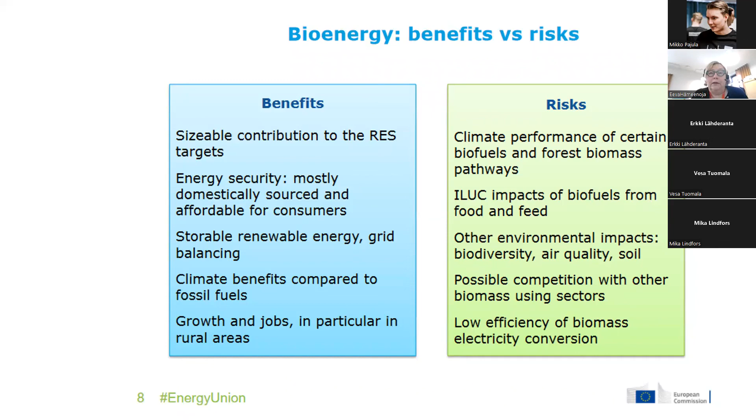And well, there were already these strengths and weaknesses. There was an aspect of sustainability, but if you think about the positive things, there is of course the reduction of fossil fuel energy dependency, addition of value to local agriculture and forestry inputs, development of circular economy, creating some job opportunities, and contribution to reduce energy poverty by offering an affordable renewable solution.

For example, here is the utilization of food waste for producing biogas and so on. It could answer to this. Promotion of local development and so on. And contribution to achieve EU carbon neutrality, creation of new uses for waste and boosting of circular economy, mitigation of greenhouse gas emissions, and improvement of forest management, lowering the impact of climate change disturbances.

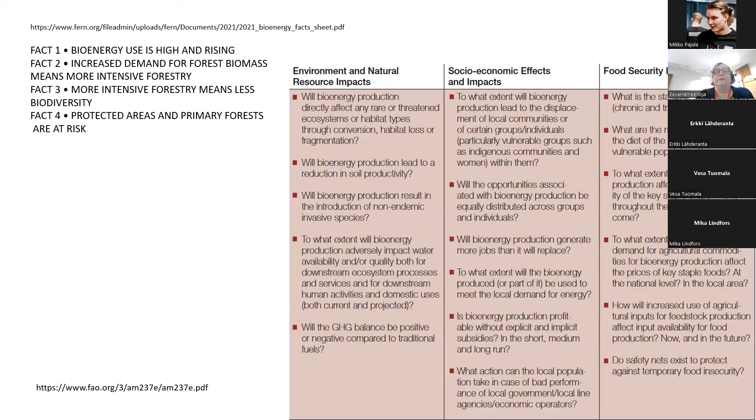Yes. But then bioenergy use is high and rising. An increased demand for forest biomass means more intensive forestry, and more intensive forestry can mean less biodiversity, and protected areas and primary forests are at risk. So these are some claims against this increasing use of bioenergy, and these are some set of questions FAO asks in the communities when they are starting a bioenergy project, in order to find the ways to go on and to find the weak points.

The main thing the EU is doing to answer this sustainability question is the new renewable energy directive, and its revision, which has been given and which is under discussion in European countries and the European Union right now. The EU has also given a biodiversity strategy for 2030, a comprehensive, ambitious long-term plan to protect nature and reverse degradation of ecosystems.

It has 3 targets concerning the network of nature protection areas. Increasing the surface area protected so that a minimum of 30% of the EU's land area and 30% of the EU's sea area is covered by legal protection; strictly protecting at least a third of the EU's protected areas, including all remaining primary and old growth forests; and more effective management of all protected areas.

And well, these are good targets, of course. In countries like Finland, where we have a lot of forests, we have at least our own opinion that we have protected quite a large part of them. So it's not always so easy to find where to increase this protection, but it is needed, and hopefully it's done throughout Europe. Because with biodiversity, we have the signs that we have to work for it, to protect the species and protect nature.

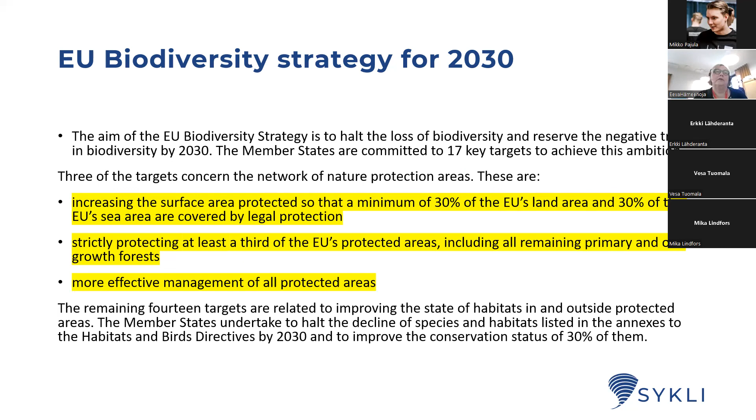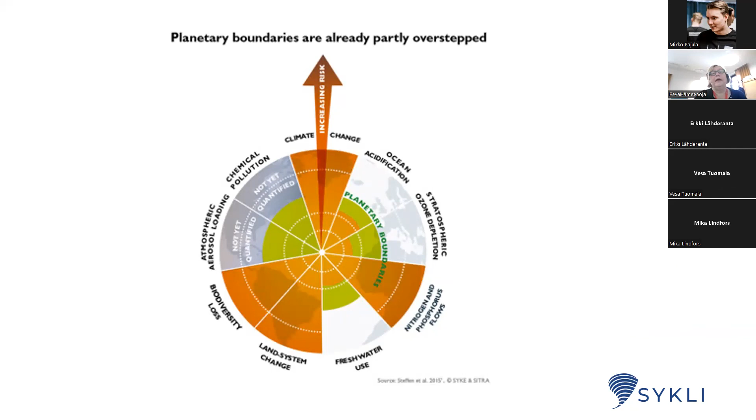Then here at the end, I want to say that because we have already partly overstepped the planetary boundaries, I think bioenergy is one of the good answers to that, but we have to use it in a very clever, very wise way, and we have to find ways to limit our consumption and to be energy and material efficient, because we can't forget that part.